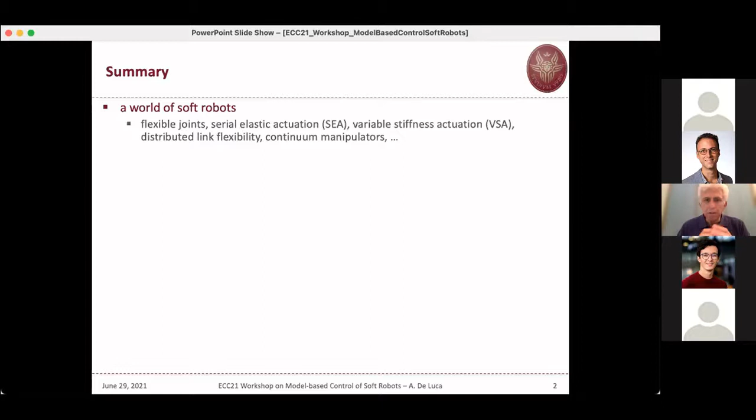I will start with a kind of categorization of the various types of soft robots that we are dealing with, just to fix the context, because this is very important. Then I will deal a lot with robots with flexible joints, which was my original PhD thesis, and I left this topic for a while, and now I'm recovering it, so the dynamic modeling. And I will consider first the problem of trajectory tracking, so following the desired reference trajectory in the configuration or in the Cartesian space, which is solved in this case by the feedback linearization method, which is the extension of the version of computed torque for rigid robot arms.

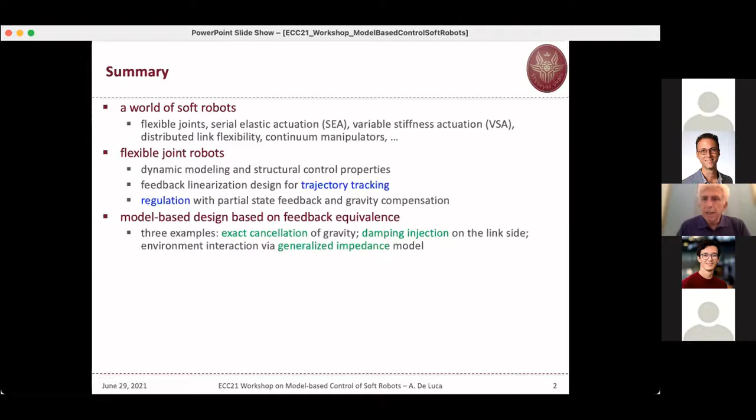And then I will move to regulation. Usually these two control problems are considered in the reverse order because regulation is easier than trajectory tracking in general. But the reason why I organized it this way is because on regulation, so on using only a partial state feedback, we have learned this morning that measuring the state of soft manipulators is very complex. And because it deals also with the problem of handling gravity, which is per se a special problem. And also because this will let me introduce a different way, different from feedback linearization or just Lyapunov-based techniques, to handle certain problems, which is the feedback equivalence concept. It is a very standard one, but I will present three applications of this concept, which were very successful indeed.

And this again on flexible joint robots, although the same idea can possibly be extended also to soft manipulators of the continuum type. If we have time, I will show a couple of videos on application of these techniques for flexible joint robots. Otherwise, I will skip and move to the second part, which deals with flexible link robots, again dynamic modeling. And as for flexible joint robots, I will point out some structural properties which are relevant for control, namely the role of the so-called zero dynamics.

Zero dynamics, for those of you who have a background in linear control theory, is just the location of the zeros of a transfer function in a linear single-input, single-output system, but this concept can also be generalized to the case of nonlinear systems, where you associate the dynamics when the outputs are fixed to be constant or zero. And then in that case, I will show some simple control schemes for regulation and for trajectory tracking at the joint level. And because of the nature of the zero dynamics in that particular case, I will show what the criticalities are in trying to execute a trajectory at the end-effector level of a flexible link arm.

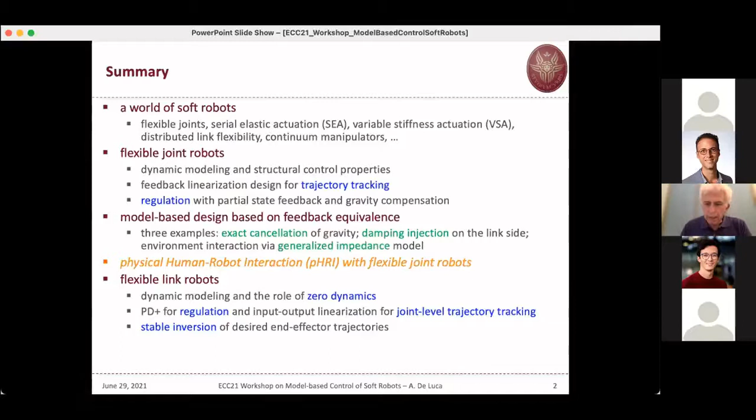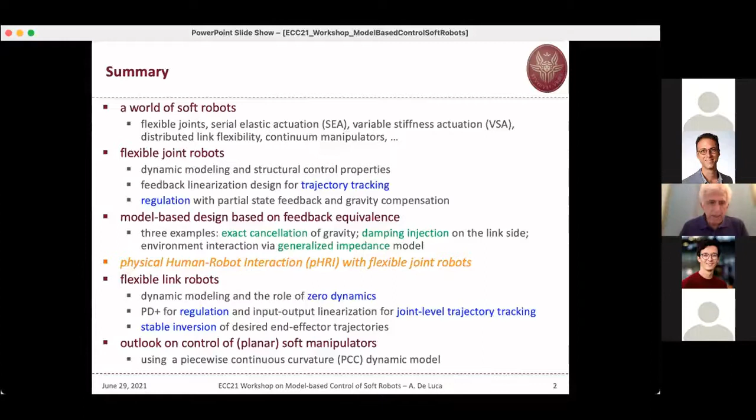So what we would like to do, in fact, is the tip of the end effector, which is what we are more concerned with. But in that case, because of the presence of an unstable zero dynamics, we need to invert the system in a very special way. And then finally, I will try to present things in such a way that some of this may be extended to the control of soft manipulators. I will limit myself to the planar case. In particular, I will use the so-called piecewise continuous curvature dynamic model that Cosimo also uses or introduced probably. And just to highlight some very recent work that we are doing together with a master student of mine, Pietro Pustina.

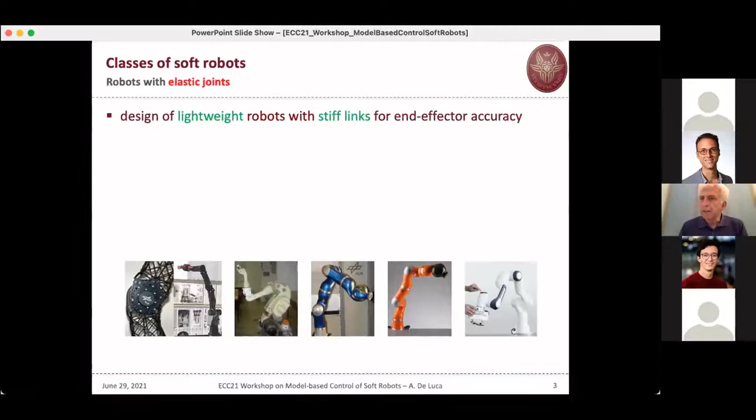So, classes of soft robots. Elastic joint robots are in fact traditional industrial robots. In fact, elasticity at the joint was seen as a parasitic effect for rigid structures that are built in a massive way with stiff links because of end-effector accuracy requirements. But indeed, nowadays, there are lightweight links, still stiff, but they typically have compliant elements distributed in the structure, which arise either from the presence of elastic transmissions, typically harmonic drives, or series elastic actuation, or cable-driven robots. But you may also include some soft coverage of the link in order to absorb impact energy if these lightweight robots are being used in the presence of humans, so for physical human-robot interaction.

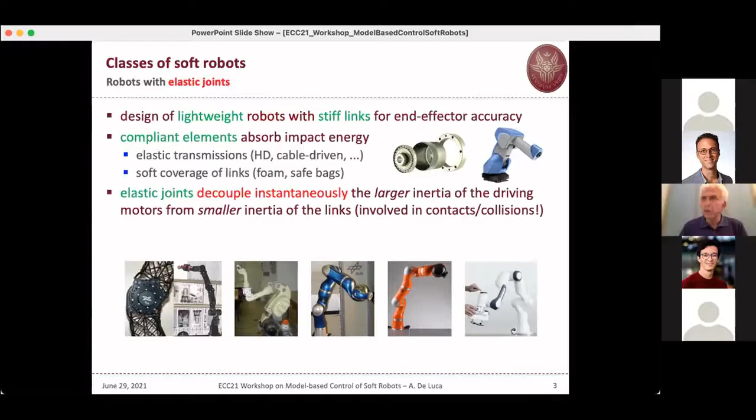Now, another relevant aspect of joint elasticity is that elastic joints decouple the still large inertia of the motor from the small inertia of a lightweight link. This is very important to transfer the minimum amount of energy in an undesired impact with the environment or with a human. So this is a very important thing.

Indeed, as we have learned for more general cases, this is the first case where sensing is very important, because in order to understand the state of the robot, we need at least a measurement of the encoder on the motor side and of the position of the link, or a joint torque sensor, or a combination of these. We need this information to get a full state picture and compensate for deflection in the static case or vibration while tracking a trajectory.

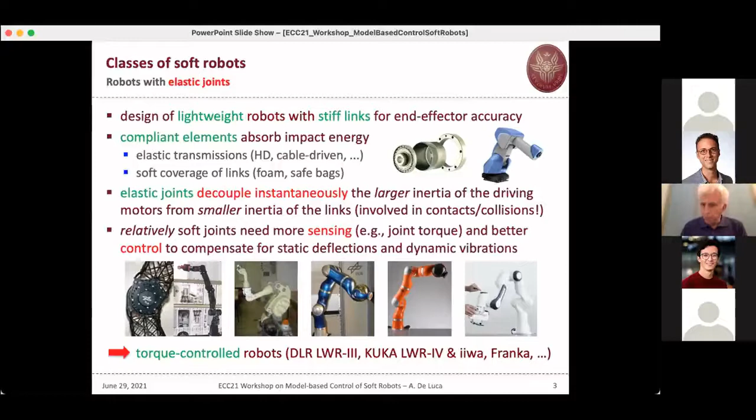So the whole class of torque-controlled robots nowadays, and here I'm listing a few of them, are in fact robots with elastic joints. They use the joint elasticity in order to impose the torque commanded by the user. Now there's another class of joint elastic systems, in the sense that the actuator itself contains an elastic

device, which are variable stiffness actuators. Typically, you have double the number of motors, either in a serial configuration or in an antagonistic-agonistic pair, and you are able to change the stiffness of the joint together with the motion of the links. So these are, again, flexible joint robots, but a characteristic needed to have variable stiffness is that the flexibility, either by a nonlinear spring or by nonlinear kinematics attached to a linear spring, should include some nonlinear effect. Otherwise, you cannot change the stiffness.

And there are several ways of using this. This is the traditional one introduced by Antonio Bicchi: stiff when moving slow, in order to have performance, and becoming soft when getting fast, in order to keep safety. There's also the possibility of using in parallel the passive joint elasticity and some active impedance control strategy, so that you can amplify the possibility of compliance in the various task directions by combining these effects.

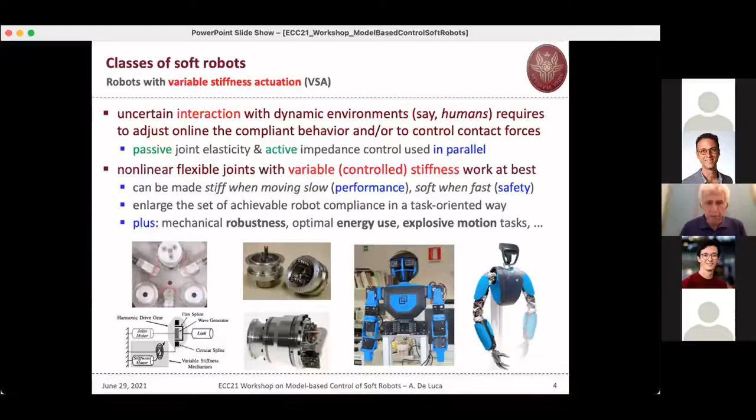And finally, there are many more things that can be done with variable stiffness actuation. First of all, these devices are more robust to impact. You can use energy optimally, and you can release energy in an impulsive way so that you achieve extremely dynamic performance. Now, the third class is robots with flexible links.

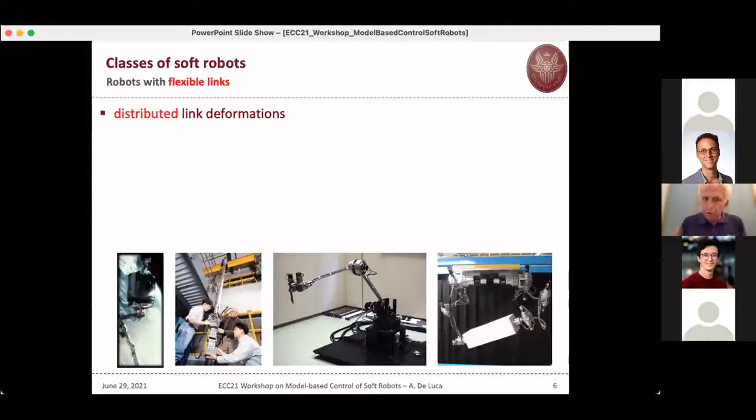What is different is that we don't consider concentrated deflection or deformation anymore. It is distributed along the length of the arm. Why? Because these arms are very long and have a slender design, as the application is needed in space, underwater, underground, and so on. At the same time, they are lightweight because you have to save weight, since this costs, especially in space applications. There are other reasons why an apparently rigid link robot behaves as a flexible one: when it is moving a large payload, or hitting the environment with large forces, or in general when you are increasing the speed up to the limit

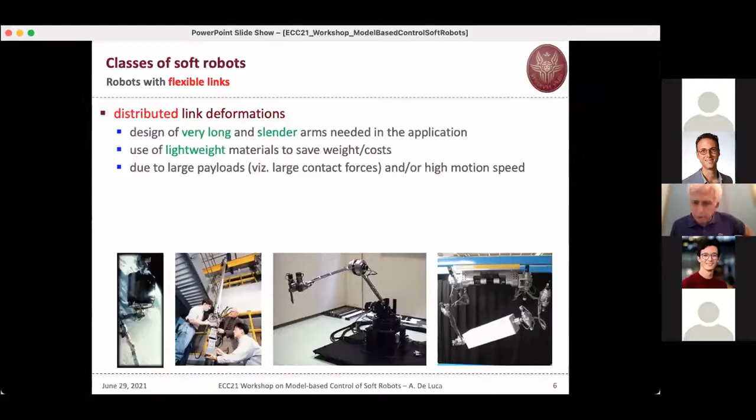of the actuation. Now, again, modeling is important, because if you neglect flexibility, like in the joint case, you will have a limitation in performance, both in static and in dynamic conditions. So including the modeling in the control design is very important to achieve superior performance.

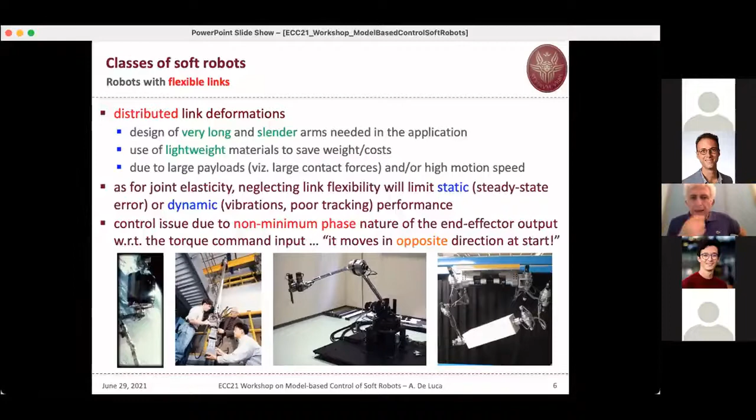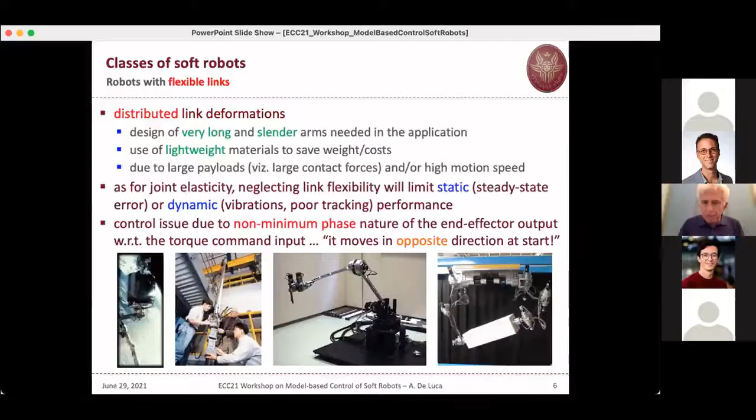Now, in this case, a very important point, and you can fix the idea by looking at the third picture in a row, which is the flexible 3R arm of the University of Tokyo. If you focus on the motion of the end effector, you may wish to track a desired trajectory. The first command that you give at the joint will typically be associated with an acceleration of the tip in the opposite direction. So this is a rule of thumb for understanding that there's a non-minimum phase nature in the mapping between the command at the joints and the non-collocated output of the system. I think this problem may happen also in the case of soft continuum manipulators. So keep this in mind, because I may say something later on.

Now, the last class is continuum soft manipulators. I will very briefly say why this is important. Indeed, there are many useful special robotic applications that require this possibility of reconfiguring the arm.

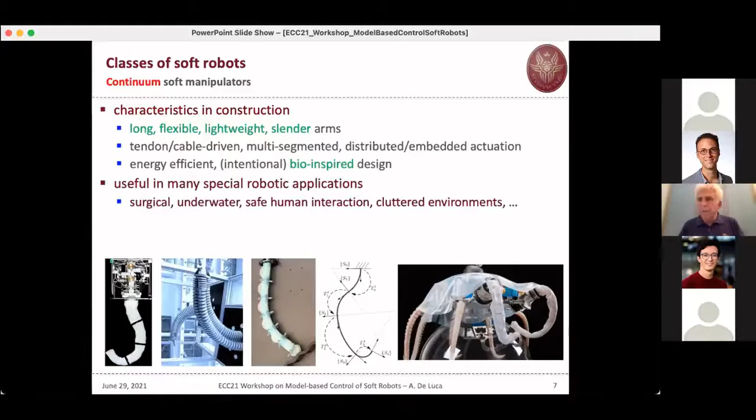I would say that one main difference between flexible link robots and continuum soft manipulators is that you're able, by control, to keep a deformed configuration as your target, while, as you know, a flexible arm, in the absence of gravity or in the absence of external contact, will always resume its undeformed configuration, no matter which controller you're using in a static situation. Well, this is not the case here.

And you can use this capability of soft manipulators to penetrate very cluttered environments, to embrace objects and things like that. The modeling, I understand there are many techniques, many of them include approximation. You can model only the kinematic aspect or the quasi-static aspect, or more recently also the dynamic aspect of your continuum soft manipulator.

And let me conclude this brief panorama by saying that at the same time, there are control issues for this class of robots, as far as I can see, in the fact that there are a large number of degrees of freedom, so these devices are highly redundant with respect to the specific task that you want to achieve. If you don't want to control the configuration or the curvature along the whole structure, and you just want to position the tip of your flexible robot, I've seen this morning a very interesting simulation by Grazioso, I guess, then you have redundancy with respect to the given task. And you have to consider what happens to the extra degrees of freedom, which are not seen from the point of view of the task output.

And on the other side, you have a classical situation of underactuation. Underactuation may be hidden in the construction or more explicit. For instance, I may consider the fact that you have a segmented structure. Each segment has, in principle, an individual actuation, but some of these actuators may fail or may not be present because of cost and construction. So in that case, you have an explicit underactuation that you have to deal with, and the same underactuation that you have for flexible link and elastic joint cases. The main difference is that you have here a distributed type of actuation.

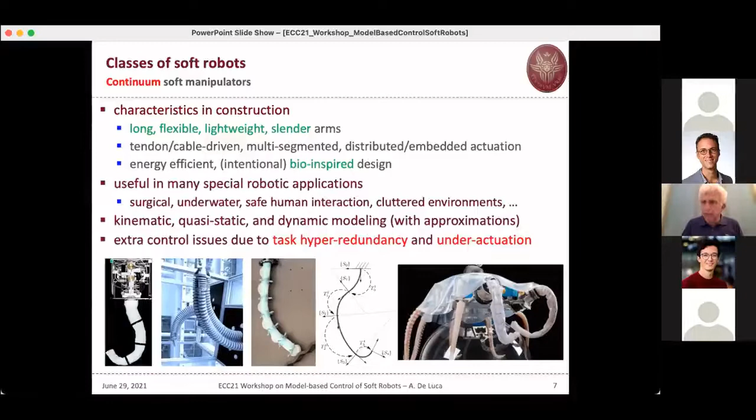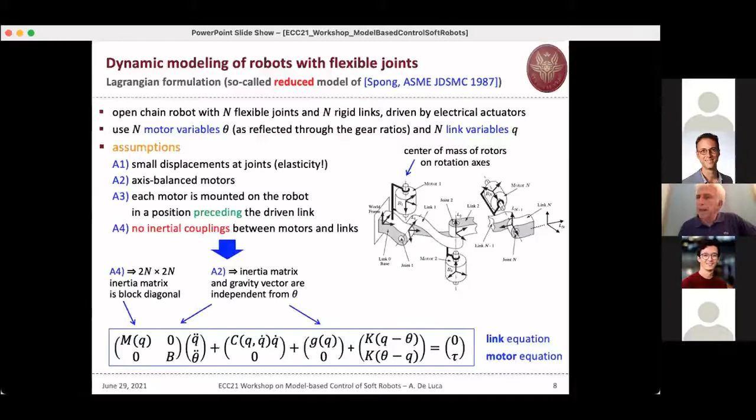Now, with this in mind, let's focus on the modeling of robotic flexible joints. There are a number of assumptions that are made, which lead to the so-called reduced model of Spong, introduced in '87. This is not the most complete one, but it's the most used and also a reasonable one. And as you can see, you end up with 2n second order differential equations. These are ordinary differential equations. If you have n joints which are flexible and they are moving n rigid links, you double the number of generalized coordinates, and you end up with what is called the link equation, which has a 0 on the right-hand side, which means that you don't have an explicit input on the link coordinate, because you're applying torque on the motor side.

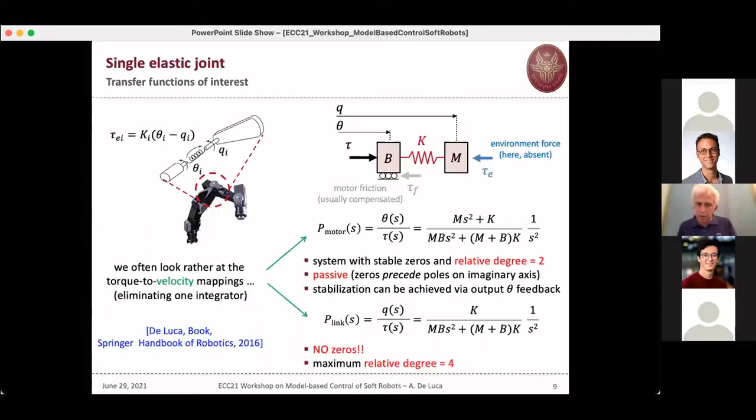So the difference is 4. And in fact, you can see that you can eliminate one integrator and have a mapping between torques and velocities of the motor or of the link, and you have a transfer function of this kind. And you can recognize the typical anti-resonance resonance frequency behavior of the amplitude of the transfer function of an elastic joint when the output is the motor position or velocity, while you have a pure resonance at the special frequency for

the link output. So in the first case, you have zeros, and these zeros are minimum phase. In fact, you can see that the phase never goes below minus 90 degrees when the output is velocity, or never goes below minus 180 degrees when the output is position, while you have a different situation in the case of a link output, because you have a pure resonance, you have no zeros at all. So this makes a lot of difference from the control point of view.

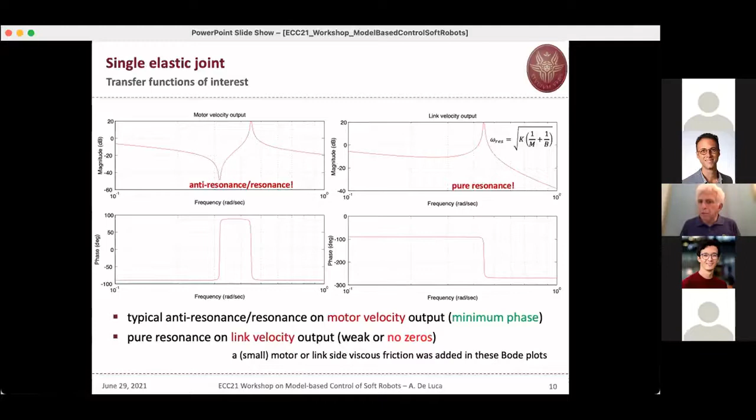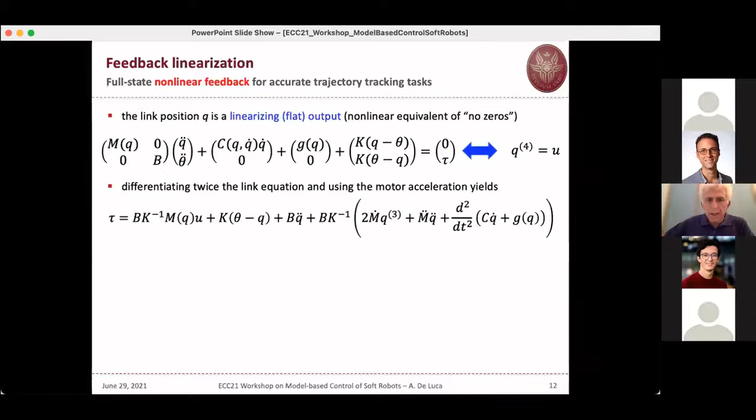Now let's go back to the full nonlinear model, and this is again the model. Not by chance, I mean, this is a standard result. If you take the link position as output, those that have no zeros in the linear case, but also in the nonlinear case, you can say that there's no zero dynamics associated to the fact that you're fixing the position output Q to a certain value, then this is a linearizing output, also called a flat output. Which means that you can find a control. And in fact, you can find this control just by looking at the second order dynamics and differentiating twice the first equation, which is always equal to 0, until the acceleration of the motor appears, and then replacing the second equation and solving for tau.

So by applying this very complex law, I would say, you are able to achieve a linear behavior and also input-output decoupled. So every new input u_i for each joint controls the fourth derivative of the associated joint variable or link variable. Indeed, you have to stabilize this, but you can do this with standard techniques in the linear domain, single input, single output. So this is a trivial aspect.

Now, if you look at this control law, you see that you have Q, you have Q dot, you have Q double dot, and even Q triple dot. So you need higher derivatives, which nobody would give you. But luckily, if the model is good, from the model all these quantities can be computed from standard measurements, which are, for instance, position of the motor and position of the link, or position of the motor and joint torque sensor, and numerically differentiating only once this quantity in order to get the full state. And from this full state, you can also derive the expression of Q double dot and Q triple dot. So this is implementable, and in fact has been implemented.

On the other side, in the expression of the controller, you also need a higher order derivative of the dynamic model terms, which is kind of boring. In fact, if you write this for a 7 degrees of freedom arm, you will get lost. Luckily, we also developed a Newton-Euler recursive method, which does not require going into the symbolic part, but computes all the needed quantities for implementing feedback linearization for the elastic joint case by numerical transformation, and the complexity is O(N^3).

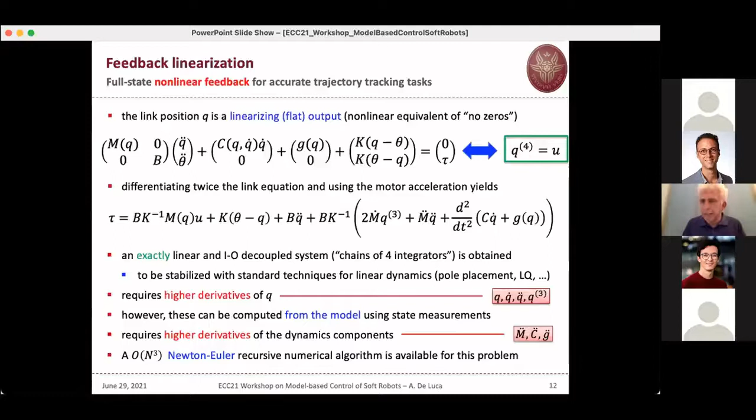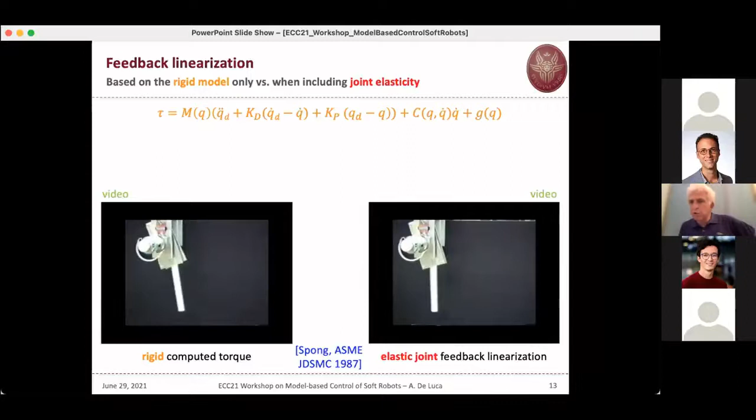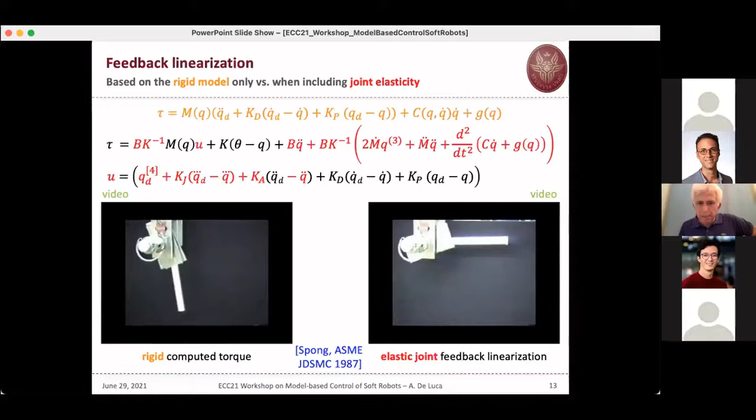Now, what is the difference between using a rigid model, and so neglecting joint elasticity, and having instead the full model? So this is an old video by Mark Spong, which shows that if you implement on a joint elastic prototype a feedback linearization controller which neglects elasticity completely, you get a very tremendous behavior. While if you implement all these terms, and I'm putting in red the extra terms that you need, then the same motion can be achieved in a perfect way. Okay, you need to do model identification and so on, but at the same level of complexity, you have much better performance. So this motivates things for a simple prototype, but also in the industrial setting, if you have joint elasticity, because of the type of the transmission of your very massive robot, you may improve your behavior if you model joint elasticity and design a controller based on this model.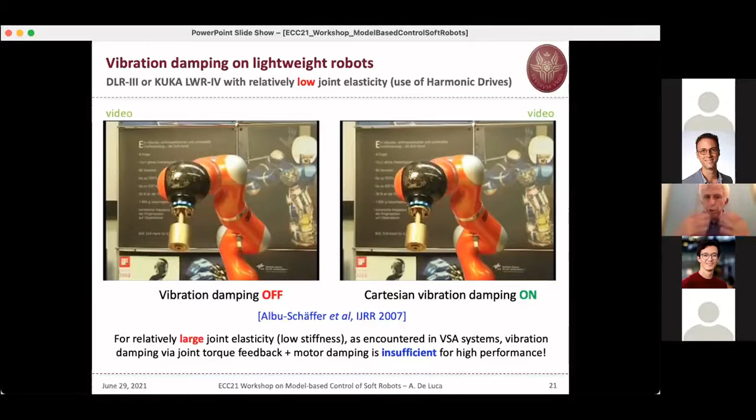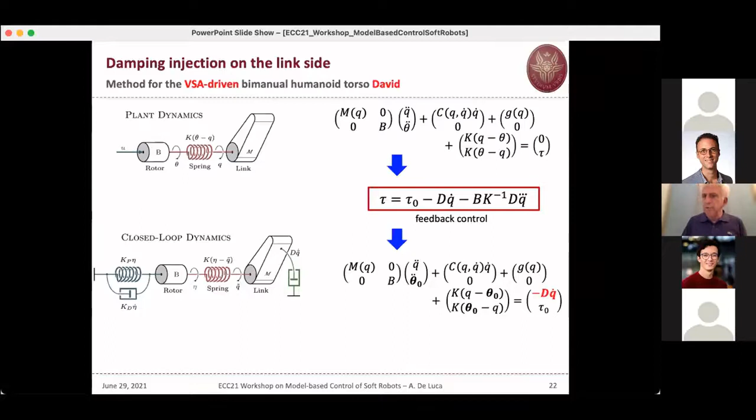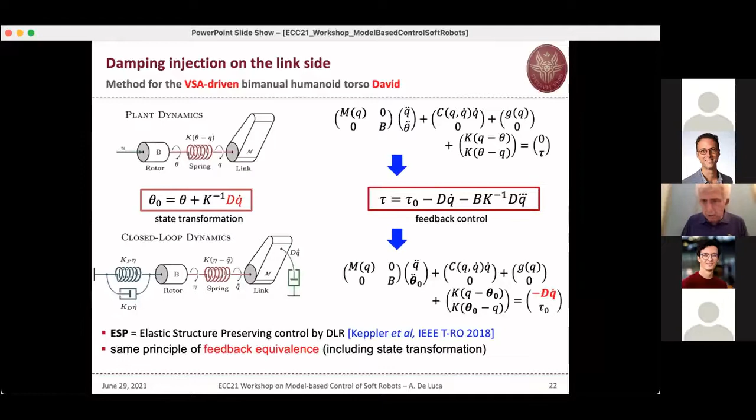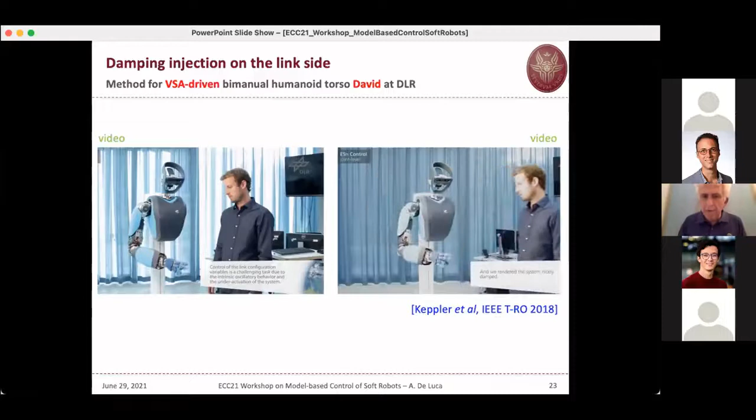of state transformation. They called this method in 2018 elastic structure preserving control, but in fact, it's the same principle of feedback equivalence of the previous result for gravity cancellation, which dates back to 2010. And this is what happened. This is the system without damping on the link side. This is a variable stiffness actuation. While when you're implementing this damping injection on the link side, you have very smooth and very unvibratory behavior. The last example that I would like to show is a very new one.

Suppose that you have a matching of an impedance model for a system that has a joint elasticity. So again, we start with this. What is new is that we also have environment force. As you know, in impedance control, you're not trying to track a trajectory or to control force, but you're trying to match a desired second order model, which relates position error with respect to a given reference trajectory with the environment forces. So here you have the same thing. The only thing is that you have double the number of equations. So how do you deal with this?

If you try to apply, say, feedback linearization, this is not the case because the system is already linear. But if you try to apply the same concept of no zeros in your transfer function, then you will end up needing a measure of the environment force, of its first derivative and of its second derivative, which is a mess. So it's impossible to be done.

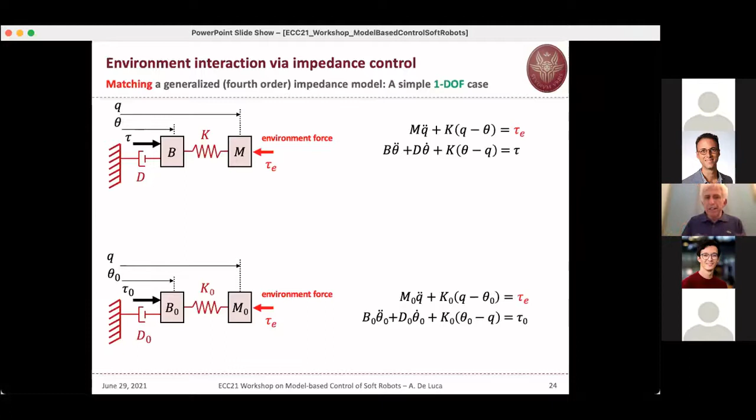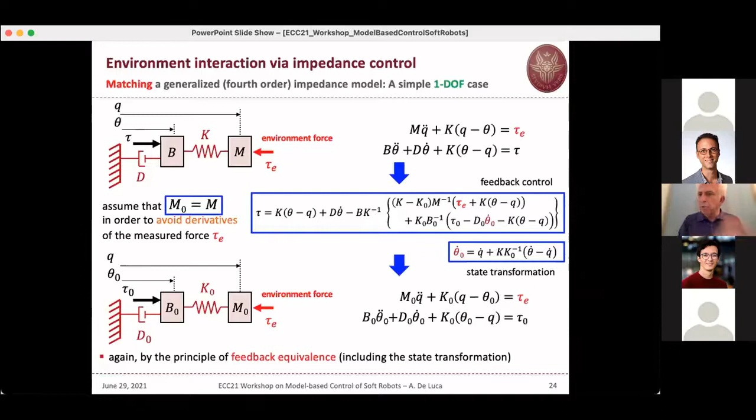However, if you apply this idea of matching through feedback equivalence a system which has a different characteristic in terms of masses and stiffness and possibly damping, without the other cancellation, and if you make a special assumption for this case, that you don't change the mass on the link side, but you're able to change anything else, then there's a feedback control law and a state transformation that lets you modify your fourth order scheme, so your elastic joint system, into the one that you desire, also for a generalized impedance control.

Okay, I will skip this. Unfortunately, I'm too late. So I will move to the second part, which is dynamic modeling of flexible arms. Now I start the reverse. I'm starting first with a single link case, which can be approximated by linear dynamics. And you will recognize that many things that have been said this morning are very similar to this case.

Sorry to interrupt, but I think it's a good moment to let you know that it's 5 minutes. Okay. Okay.

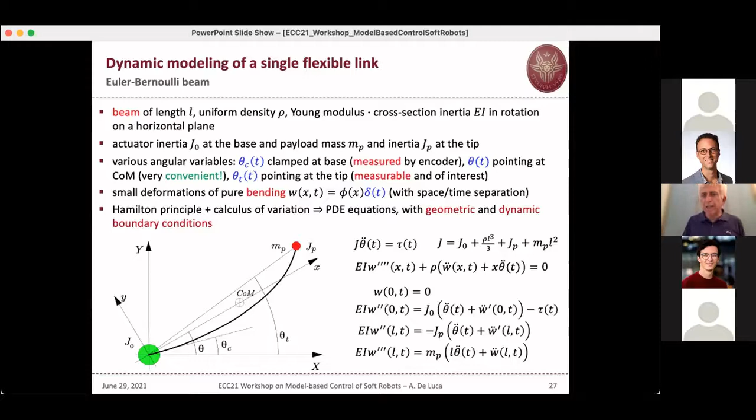So just let me say, you can see it's a flexible link that we model as an Euler-Bernoulli beam. There are various functions that you can define. You can see the pure bending in the motion plane. This plane is horizontal, typically. In general, it could also be under gravity. And you can find a PDE with geometric and dynamic boundary conditions, and the equation looks like that. Okay, you can solve this. Well, let me speak about how to solve this. But at the end, surprisingly, the model is extremely simple once you have set up the correct boundary conditions and use the correct variable.

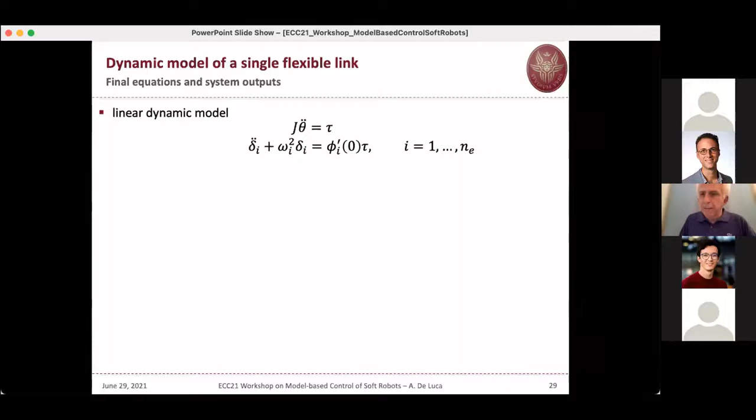So you can see a rigid rotation plus a superposed number of vibrations, and you can have a finite dimensional model by considering a finite number of modes. You can include modal damping. You can have two types of output here, and this is what I wanted to stress. The rest you can forget. Again, you can control in this flexible link the position at the base, which is the one that you measure by the encoder at the motor, and you have a minimum phase output. Whereas if you control at the tip level, you have a non-minimum phase output.

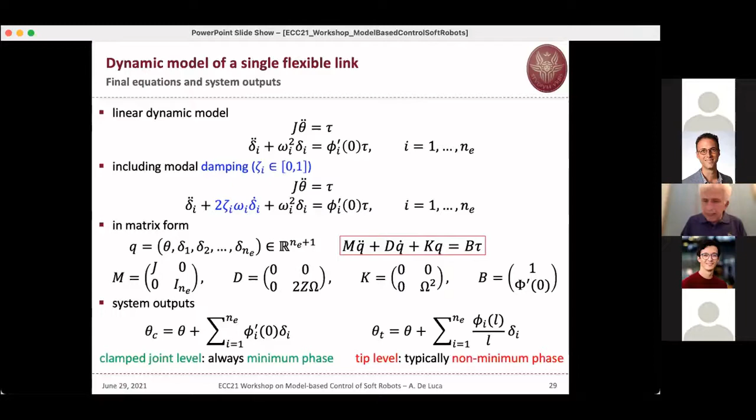Now, what is the result of this? Let me jump to the conclusion. It is that you cannot apply inversion techniques or canceling techniques when you want to track a trajectory at the end effector level. The result is that you end up with instability in the closed loop, and there's nothing you can do unless you resort to very special techniques which require a non-causal solution to the problem of inversion, or a different way of approaching things like nonlinear regulation. I think that I will skip all this aspect.

Well, let me say just if you move to multiple flexible links, you have a situation which is very similar. You can see that in this case, the inertia matrix is completely full. It depends in general both on the rigid variable theta and on the deformation variable delta. You may include gravity effect, Coriolis centrifugal term. You have a special part, which is the last one, with K delta plus D delta dot, which is the stiffness of the various modes and their damping.

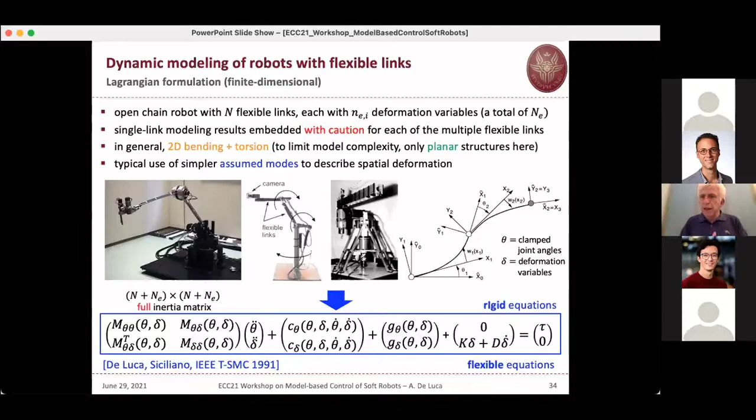And again, you see that torque is only present on the rigid motion, not on the flexible motion. And in this sense, these structures, like the previous ones, are also considered as underactuated. And this is a very important aspect.

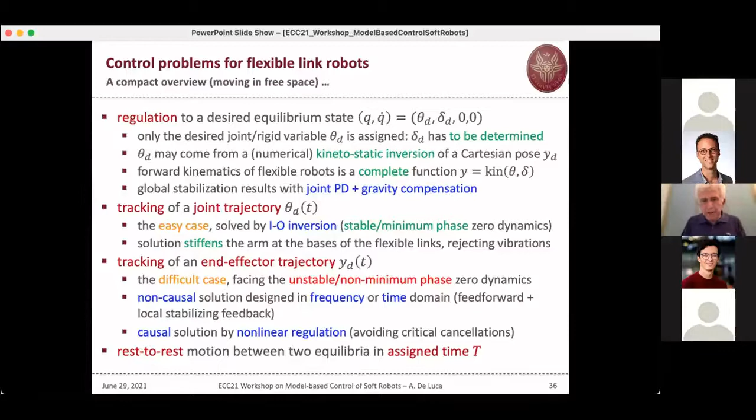Now, let me say just what are the problems, without giving the solution. So you can still have regulation, and regulation is simple. Like in the joint elastic case, you can do a joint PD plus gravity compensation. You can track joint trajectory by inversion because the input-output map is minimum phase, so you don't introduce instability in the closed loop. If you want to track end effector trajectory, and this is the difficult case, you have to resort either to a non-causal solution or to a solution that avoids critical cancellation. And you have also other problems you can consider here.

Let me skip this part completely. I'm sorry, there are many results. Okay, let me conclude with a simple application of this concept.

So I'm considering one particular model of a soft manipulator, a continuum one, the one introduced by Cosimo. You may be familiar with that. Now, the main point here is that you may have a system which is fully actuated. So each segment of this piecewise constant curvature model has an individual actuator. And then in this case, you can do whatever you wish, I would say, by mimicking what has been done for the rigid robot, with the only difference that you preserve the stiffness and damping of the natural system.

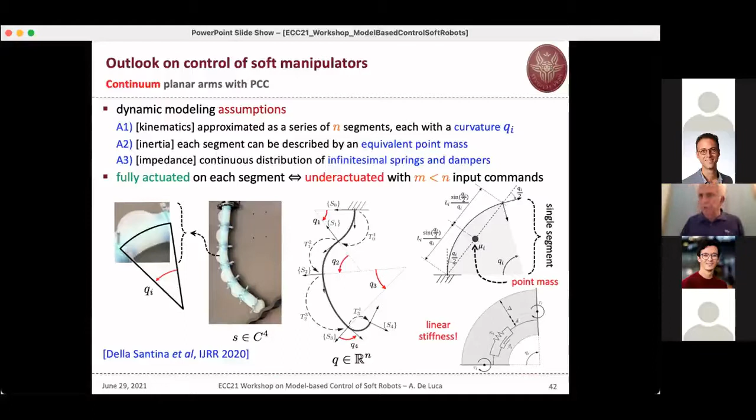On the other hand, you may be underactuated. So some of these segments may not have a command, by construction or by fault of the actuators. This is another thing that should be considered. So what happens in that case? If you are actuated, the model looks like this, and you can do a number of things like Cosimo has shown in this paper.

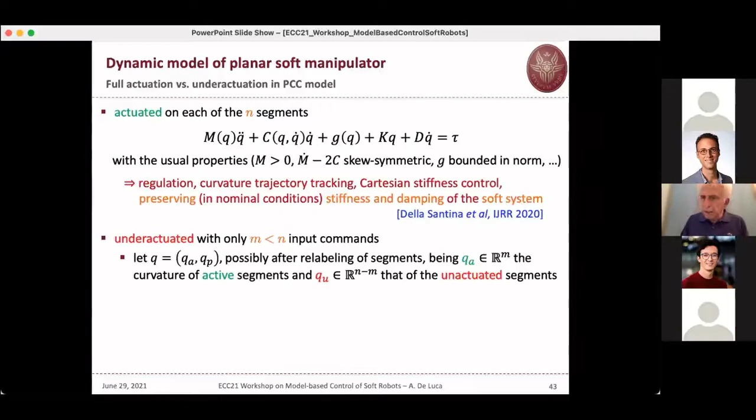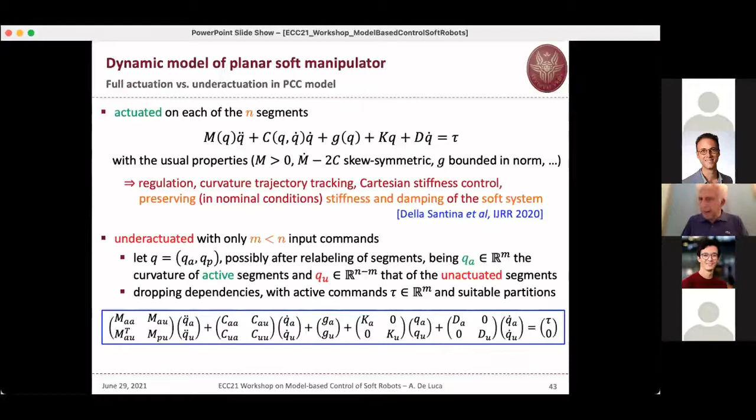If you're underactuated, you can partition the system into actuated coordinates and passive, or unactuated, coordinates. Sorry, this P should be a U, unactuated coordinates. And you can reorganize things so that you can partition the dynamic model in this way. And if you look at this in this way, it's very similar to the flexible link case as we have seen before. Now you have only a subset of coordinates that are actuated, and you can address a number of problems.

Okay, in the underactuated case, the first thing you have to ask is what is the zero dynamics associated to the output. So you want to control the actuated variable indeed, and you have the unactuated variable that follows dynamically what you're doing on that. You'd like them to follow without exploding. So the first thing that we proved is that in the absence of gravity, there's a unique equilibrium state for the unactuated variable, which is globally asymptotically stable when you fix the output. So when the output is zero, also this variable is zero.

In the presence of gravity, indeed, there's a deformation of the unactuated segments, but they converge to a solution, one solution, I would say, not the unique solution in general, of this equation, which connects the stiffness of the unactuated segments with the gravity affecting the segment. You can see that, indeed, if the gravity is not there, the only solution is Q equals 0, which is the case of absence of gravity. And you can prove this by Lyapunov. So this gives hope to the regulation problem.

For instance, if you want to regulate to a desired actuated variable and zero curvature in the absence of gravity, then a controller which is only designed on the actuated part with a feed-forward term on the desired curvature of the actuated segment works, and works globally. Okay, in the presence of gravity, you can add gravity compensation at the destination, and indeed you need to compute also the desired value of the unactuated variable, which is the unique solution if Kp is sufficiently large and if the stiffness of the unactuated parts is not too low.

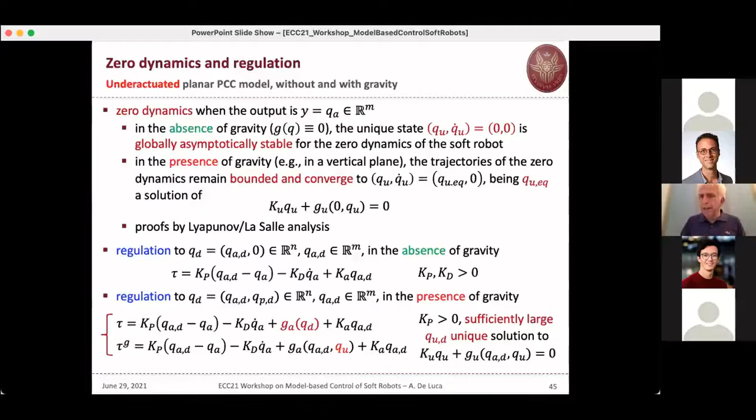I would say so. There's a structural condition. So this is unique, and this controller brings you to the desired destination. You can also have a slight variation where you use the current measurement of the unactuated variable, if you have it, okay, and have a better gravity compensation than just with a constant feed-forward term. And this is what happens with this particular case.

Here we have 3 segments, 2 are actuated. The first and the third segment are actuated. The second segment has no command. And you can see that you can go from an initial configuration in the presence of gravity to a desired one only for the actuated one, and this is the final result. So the system is bent because the second part is not actuated.

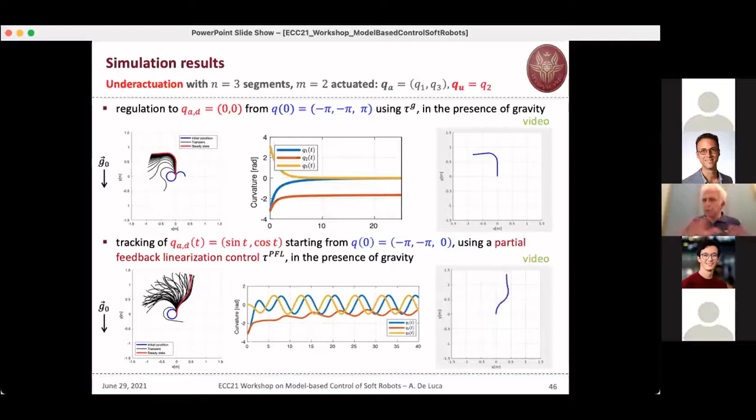But you can also use another controller, for instance, a partial feedback linearization control, which uses the dynamics in order to track a trajectory for the actuated part, and the unactuated part remains stable. And this is because the zero dynamics has been proven to be stable. Okay, so take-home message, and I conclude with this.

I'm sorry for being long, but first of all, I would say that nowadays, this workshop is one significant example. There's a soft explosion that is now going back to the old results of a mature field of flexible robot control that shows that probably consideration of dynamics is worth it, at least for designing a controller if you want to increase performance.

There are other things that I even mentioned, which combine feed-forward and feedback in order to achieve robustness with respect to external disturbance. And the feed-forward part may be learned over iteration. For flexible manipulators, there are techniques that learn very efficiently the command without knowing exactly the model. And this is something that can be applied, I'm sure, also for soft applications, plus other open problems that are left for fun.

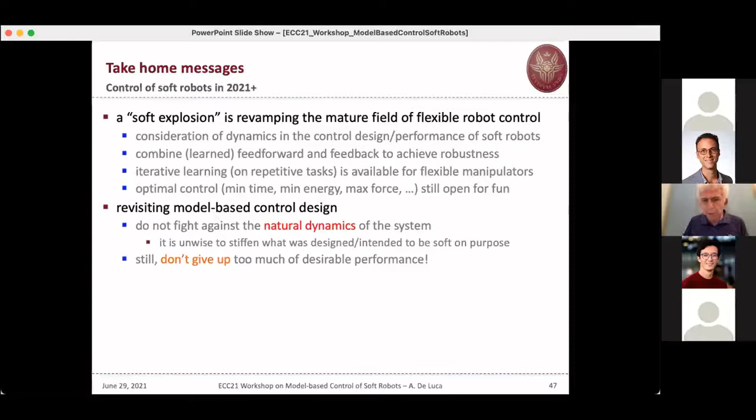And last but not least, many of these ideas, this is just a scratch of the surface, have been developed over time, adaptive control and so on, for the flexible joint or flexible link case. I'm sure that they will find application also in the concept of soft manipulators, provided that you take care of the constraints and limitations of the design, so some structural properties, and of course the application. Okay, I think I'm done. Thank you for listening, and I'm ready to accept questions.

Yeah, thanks for the amazing talk. I already see two people asking. So first, Stefano would like to ask a question. Please go.

Thank you very much, Alessandro, for the very nice talk. Please correct me if I'm wrong, because basically I would definitely agree. The standard control is stiffening things and trying to go against the physics, which is something you should not do. We definitely agree with that. But correct me if I'm wrong, because basically what you're saying is don't use things which are not collocated. That's the first thing, because you need collocation to be sure that things do not explode.

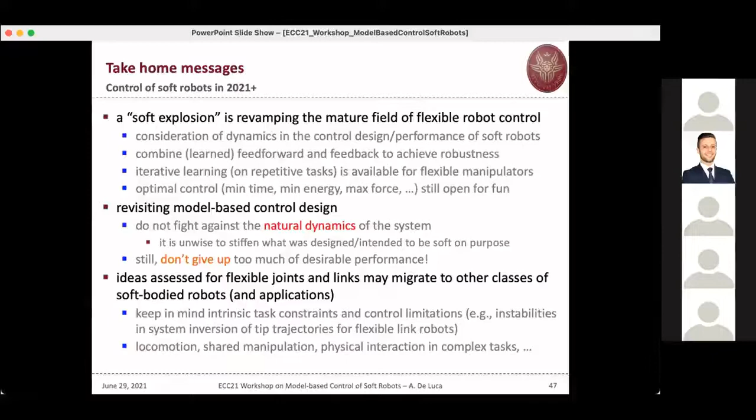Okay. First of all, thank you very much for the talk. It was very insightful, as usual. And my question is actually more a curiosity. When you were speaking about your feedback matching technique, if I'm not wrong, you say that you can modify the system with a reference model, right? Yeah. So the question is, how do you choose the reference model?

Very good. So we are working on that. And there are, let's say, two optimization problems. One is choosing the parameters of your model that you would like to match in such a way that you have the best performance in terms of what you desire. For instance, no overshooting or very quick transfer motion and things like that, or minimizing energy needed to do some displacement. Okay. Once you have done this, and this is a parametric optimization, so you have an integral objective function, but you have to modify a number of parameters in order to find the optimum. Okay, and this is one side.

Suppose that you have found the right model for the specific application or for the specific segment of your application. And now I give you a torque that maps exactly your original model to the desired one, the best one. Indeed, the original model may be very different from the optimal one. So you again may formulate an optimal problem which minimizes the effort of matching the model at the price of some error. Okay, and this is another optimal control problem. We are working on both of them. So I have no answer.

And for the second order system, so for the impedance of the rigid case, we know everything about linear second order systems. We know damping coefficient, we know natural frequency, well, whatever, in closed form. We don't have such a solution for a fourth order system.

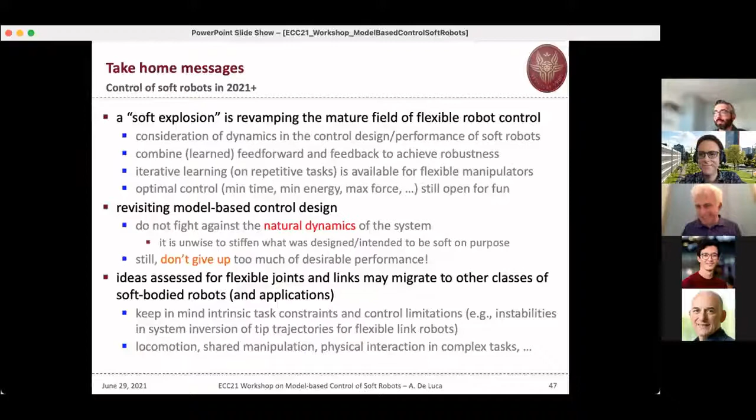And this is why we're working on it. For the moment, there are no papers. No, there are no published results. Even that slide is just a slide. Okay, I will wait. Thank you. Okay, so